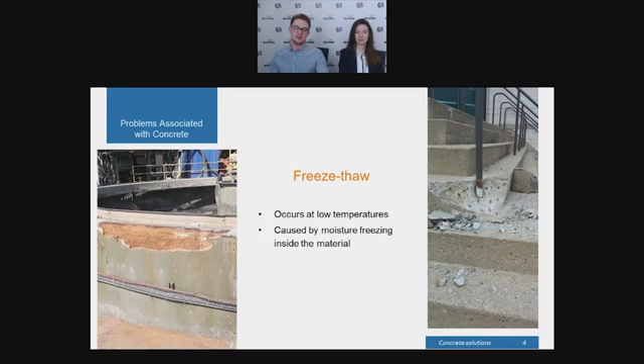Following on from the moisture theme, concrete requires moisture in order to attain a full cure. There are very set mixing ratios for concrete to get a good mix with good mechanical strength after it's cured. The strength of the concrete is entirely dependent on this moisture content.

If we have too much moisture, the concrete may stay wet for a considerably longer amount of time. Or if you have too little, it may evaporate too quickly for the concrete to attain its full mechanical properties. This is the point where you tend to get shrinkage in the concrete.

So you've got rapid evaporation, and the concrete tries to fill in those gaps, and as it does, it shrinks. As it shrinks, it pulls itself apart, much like in the freeze-thaw damage. You get internal stresses which crack the concrete and cause it to fall apart and break away. Because of this, you lose some of the mechanical strength of the concrete, meaning it can't withstand the sort of industrial environments it's normally placed into.

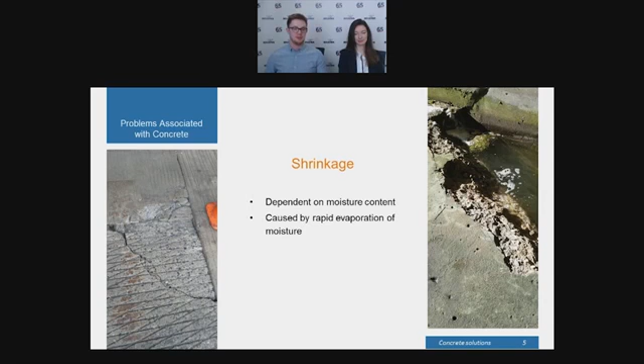Again sticking with the moisture theme, carbonation is a massive problem throughout industry. It affects pretty much all types of concrete regardless of where it is, but it's most damaging on reinforced concrete. What we mean by reinforced concrete is any concrete which has a structural rebar or steel going through the centre to give it that extra structural capability.

This is caused mainly by moisture and CO2 absorbing through the pores of the concrete and getting down to the rebar. Concrete is normally quite alkaline in nature, and the passivation layer that sits on top stops the corrosion from happening. If you lower this alkalinity and make it more acidic, lowering the pH level of the concrete, you tend to find that the passivation layer disappears.

Once this disappears, it's effectively like not having a coating anymore. The rebar starts to corrode, the rust expands inside the concrete, and exactly the same as the freeze-thaw damage and shrinkage damage, you get spalled concrete as a result. This then exposes the rebar further, causing it to rust more, and it's a vicious cycle at the end of the day.

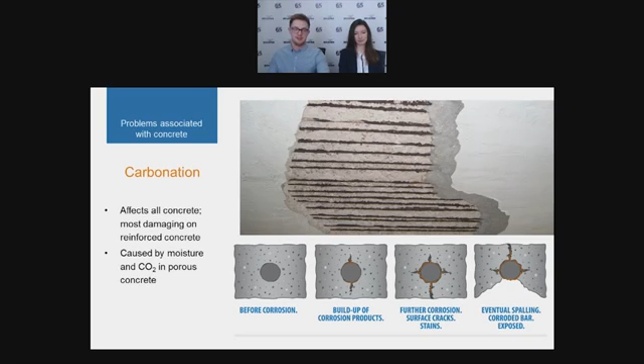More on the mechanical side of things, we have abrasion. This is a major issue in areas involving heavy machinery or types of transport. Heavy duty materials that are used, and repeated contact, cause this concrete layer to wear down over time.

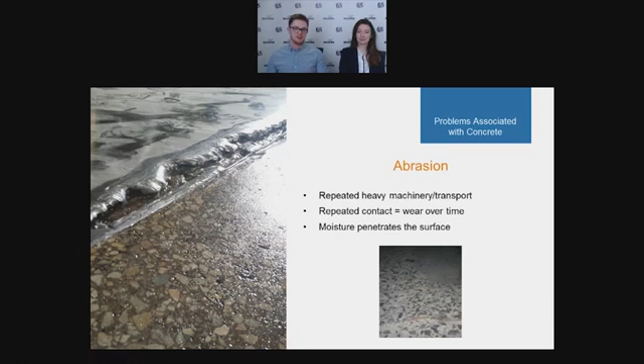But as said previously, this allows moisture to penetrate further into the concrete, and again it's another cycle. You remove that top layer, moisture gets in, that damages the concrete, the next layer gets removed, moisture gets in, and it's just a vicious cycle afterwards. So you get wear, repeated contact and wear over time.

As I've already stated, concrete is a very alkaline material, so if you change the pH it messes about with the binders inside the concrete itself. This can actually cause it to lose its mechanical properties purely from contact with a chemical of some description.

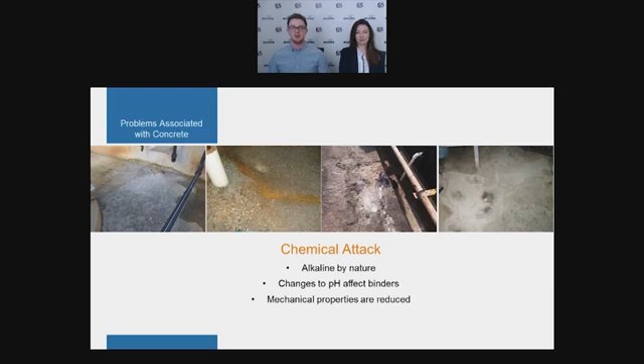So you change the pH level, you affect the binder of the concrete, and if you affect what holds the concrete together, then it's either going to dissolve into the chemical itself, or you're going to lose your mechanical properties. So if they're reduced, you'll find again that impact damage, abrasion, freeze-thaw damage, shrinkage all become a major issue and become much worse in the presence of certain types of chemicals.

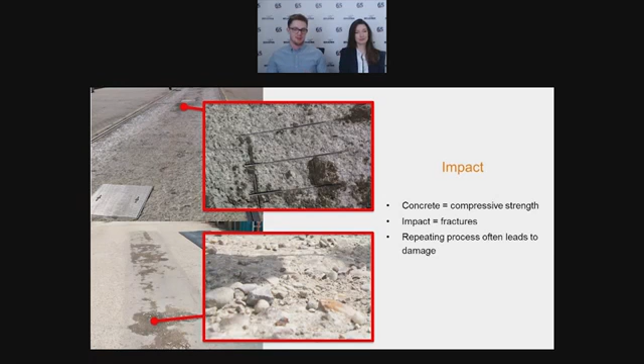So once the damage has taken place, as you can see in the pictures, it's going to be very easy for moisture to then get into the concrete, and again, it's starting that vicious cycle of damage and then moisture ingress, which causes carbonation, shrinkage, freeze-thaw, and all the damage mechanisms that we've just discussed.

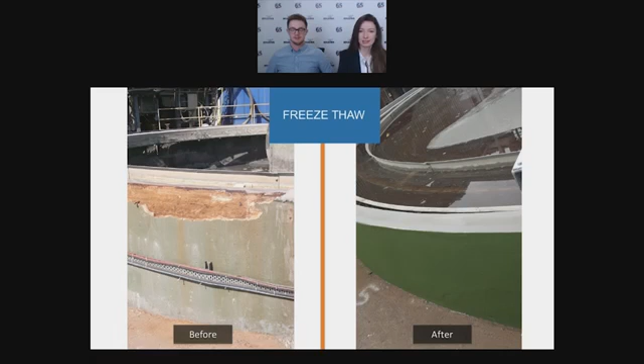Okay, so now we've explored some of the issues that concrete can experience, we want to look at the solutions, how to fix it. Like-for-like concrete repairs are often favoured, but these often struggle to adhere to the existing substrate. Besides, what's to stop the same damage from happening again?

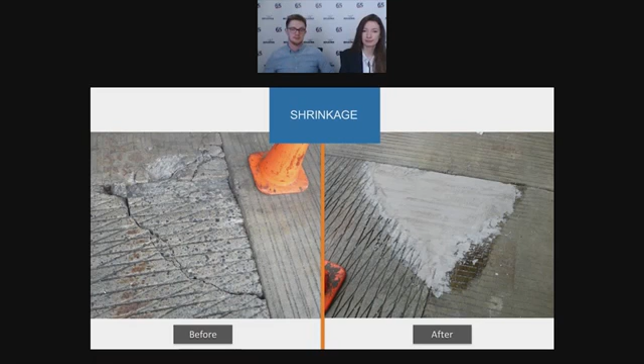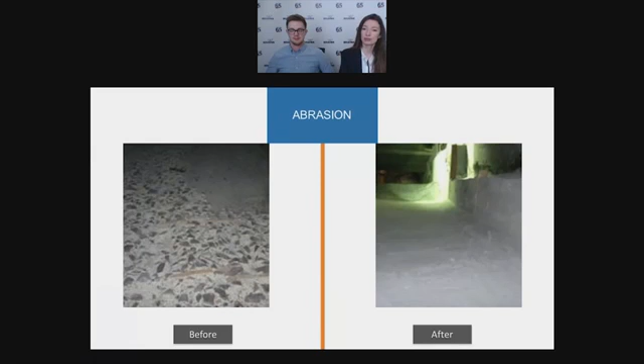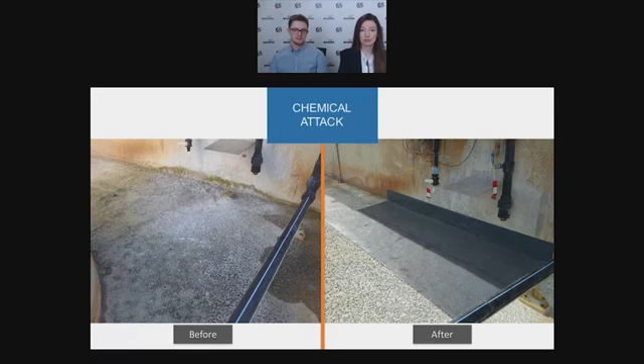Belzona has created a range of 100% solids epoxies for mortar repairs as an alternative to traditional rebuilding. These epoxies are designed to restore concrete structures, protecting them and prolonging their lifetimes. And rather than individually trying to solve every one of those issues Henry was just discussing, Belzona have created just a handful of versatile systems which can be used to treat an infinite amount of problems.

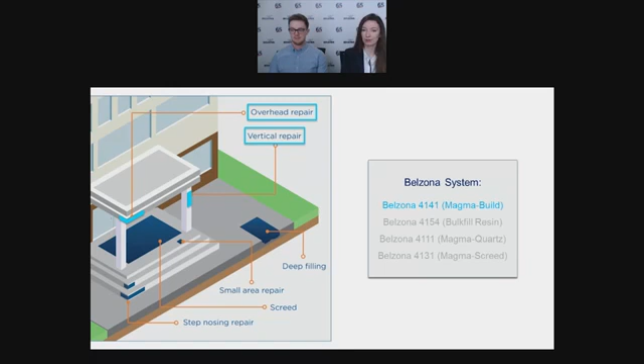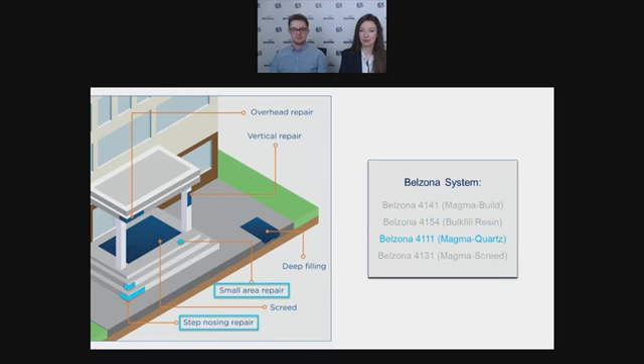So our solutions are designed by area to cater them for the necessary repair. For example, overhead and vertical damage can be repaired with our lightweight mortar, Belzona 4141. For large areas, we have Belzona 4154, a bulk fill material. Smaller repairs can use Belzona 4111, our classic nifty mortar repair composite. Or if you need to screed an area, Belzona 4131 was designed for that.

Our materials can also protect against chemical attack. Belzona 4181 is a chemical-resistant screed, or you can use the coating Belzona 4311 on top of another material.

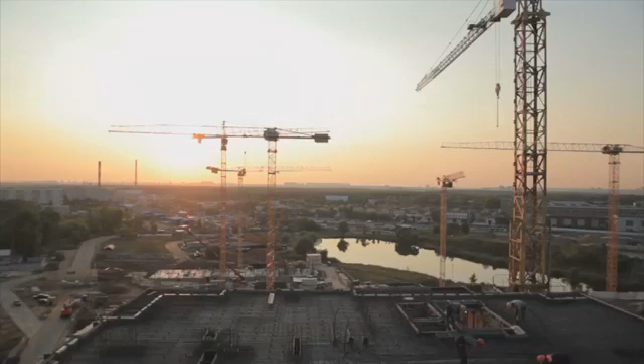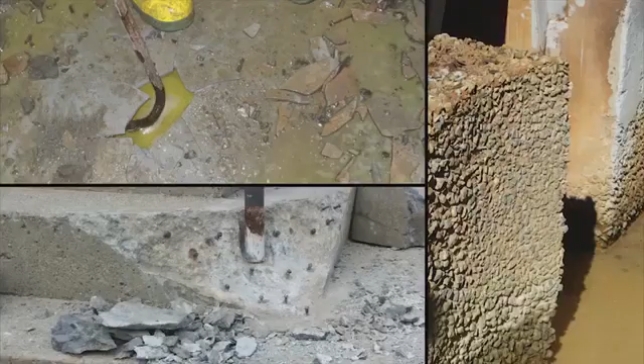Concrete is the most widely used construction material in the world. As a consequence, concrete damage and deterioration are perhaps the biggest problems encountered by buildings and structures. From floors and steps to walls and roofs, the effects of damage are clear to see across multiple areas. But is more concrete really the answer? As an alternative to like-for-like repairs, Belzona offers a variety of polymeric mortar repair and protection solutions.

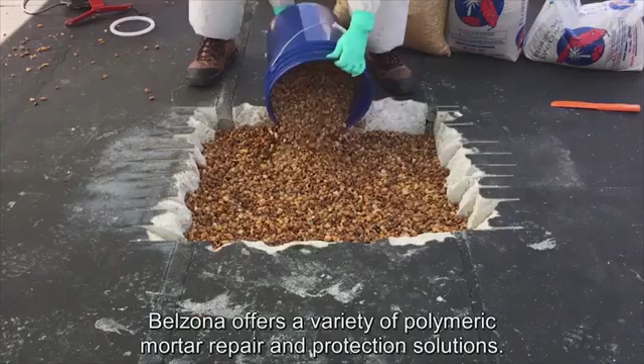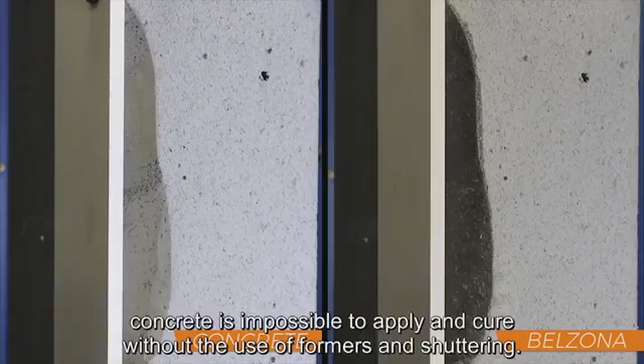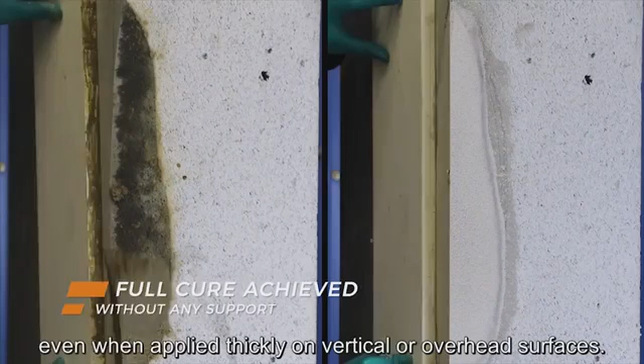These materials offer superior application and performance benefits. In this video, we put some of these to the test. For vertical or overhead applications, concrete is impossible to apply and cure without the use of formers and shuttering. Instead, Belzona's materials can repair the damaged area with minimal support and fully cure without any shuttering. For example, this high-build concrete repair material will not sag, even when applied thickly on vertical or overhead surfaces.

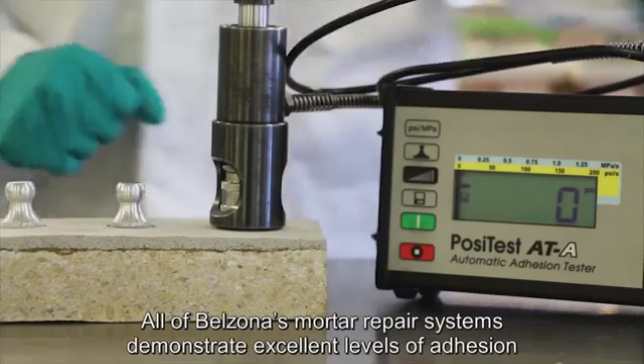The lasting quality of Belzona is better too. All of Belzona's mortar repair systems demonstrate excellent levels of adhesion, even on vertical and overhead surfaces. In fact, Belzona adheres so well that it's stronger than the cohesive strength of concrete.

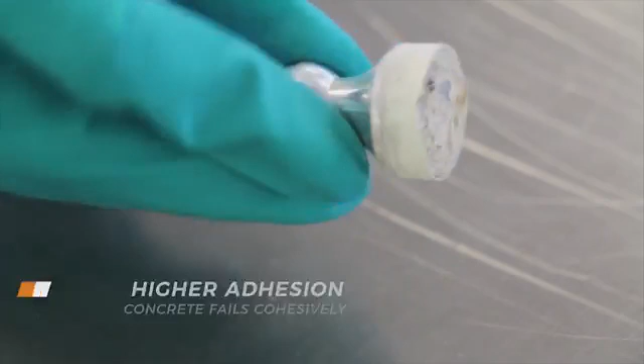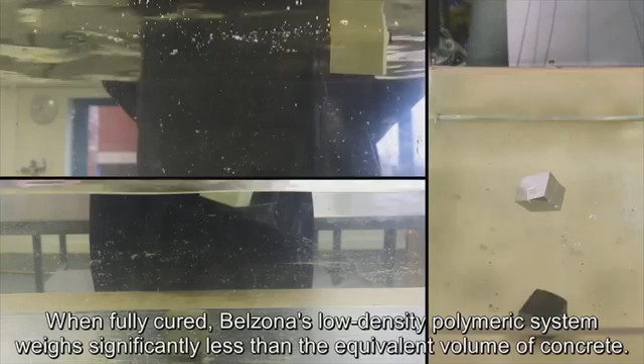Lightweight properties also make Belzona superior to like-for-like concrete repairs. When fully cured, Belzona's low-density polymeric system weighs significantly less than the equivalent volume of concrete. Lighter materials make applications easier and quicker.

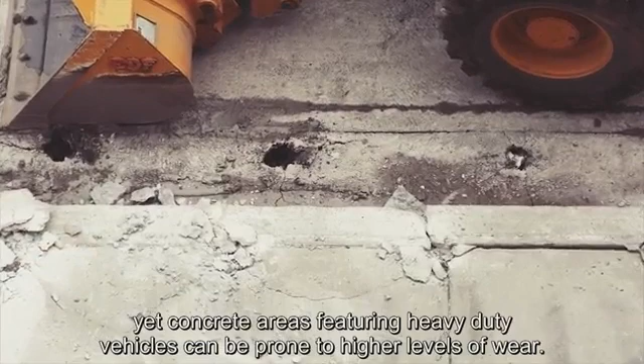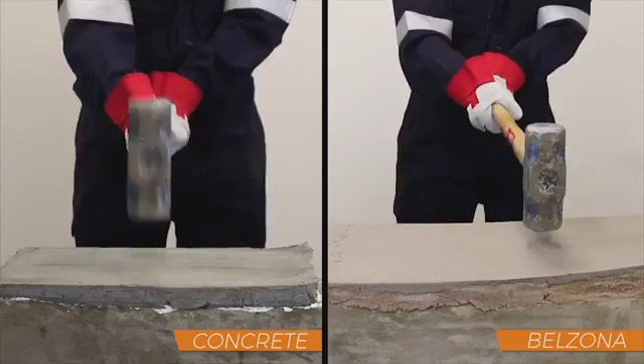Even light pedestrian traffic can result in deterioration over time, yet concrete areas featuring heavy-duty vehicles can be prone to higher levels of wear. Belzona can prevent this problem from reoccurring with rebuild materials that provide long-term resistance to both abrasion and impact. Loading bays and storage areas make excellent examples where these solutions have proved beneficial.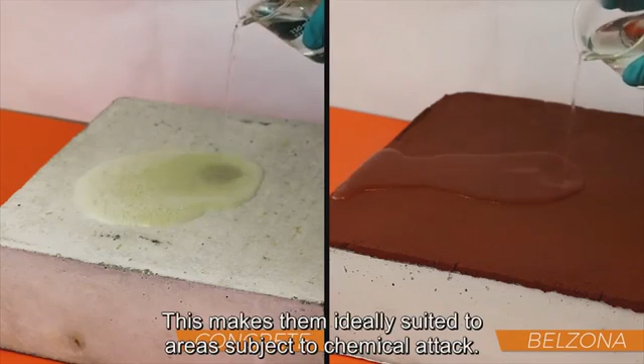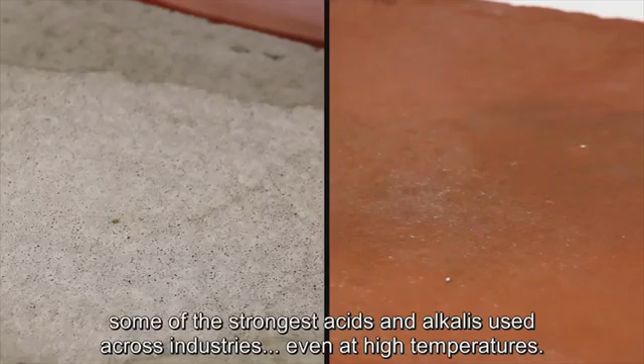Whether exposed to the environment or aggressive chemical contact, Belzona's concrete repair composites are non-porous and do not absorb water or chemicals. This makes them ideally suited to areas subject to chemical attack. In fact, Belzona's range of mortar repair materials and coatings are capable of resisting some of the strongest acids and alkalis used across industries, even at high temperatures.

For each application area and service environment, Belzona offers a superior solution to repairing and protecting damaged concrete. And as demonstrated, you can be guaranteed that these benefits will come as standard.

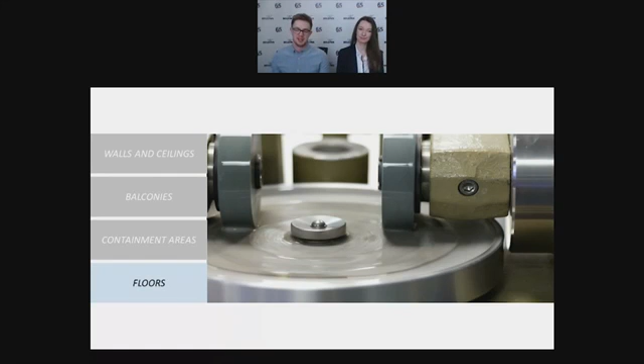Okay, so the first case study we're going to go through is to do with floor areas. The one thing we're looking for from a product to repair a floor area is mainly long-term durability. You want to be able to apply the product onto the floor and leave it to do its job for a considerable amount of time after the application.

So the first one we're looking at is inside the freezer of a meat factory. This is a good example of the type of damage you find literally all over the world in large industrial areas which are built primarily out of concrete. The concrete we're looking at inside the freezer is about 40 years old, so considering the service time it's been in for, it hasn't actually done that badly. However, if the customer left this completely untreated, it's going to cause some significant problems in the future.

When we faced the customer and said, how are we going to go about doing this? They said we've got 3 issues we need to overcome first. The first one was they needed 24/7 forklift access to the area. Second problem was that there were multiple areas, not just the one. And they also only had 3 days to complete the application.

Obviously, using concrete to fix this, you'd have to have that minimum 28-day cure time before you get your mechanical strength to allow this to go back into service. That's unacceptable throughout the 3-day window.

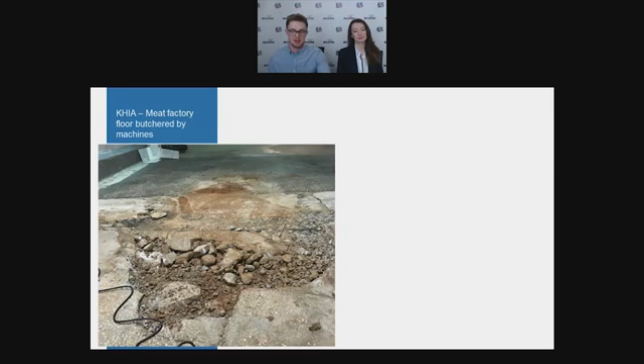So Belzona was chosen, and the first stage of any application is normally surface prep. We're looking for a surface which is clean, dry, and firm. In this case, roughness is not required because the surface was rough enough already, so you avoid the need to use machines which may incorporate difficulties in terms of hand-arm vibration values, or HAV values. So that was avoided completely.

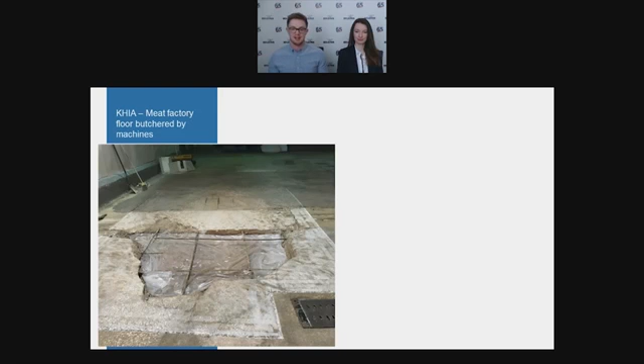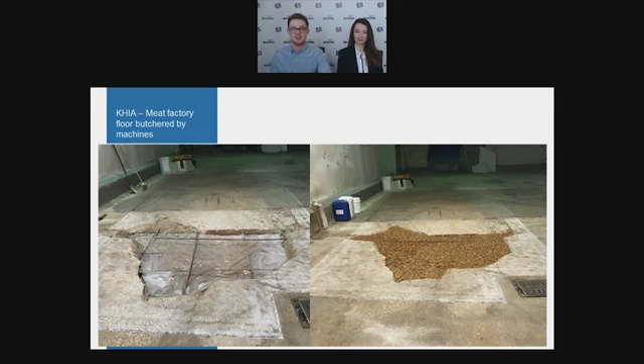The product itself we used was Belzona 4154, bulk fill resins and an aggregate to pack out the main section of the repair itself. And then Belzona 4111 was applied on top of that surface to give you your mechanical properties, compressive strength, tensile strength, impact resistance, and general dilute chemical resistance as well.

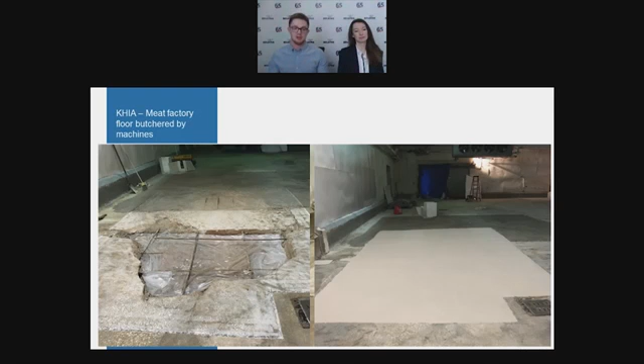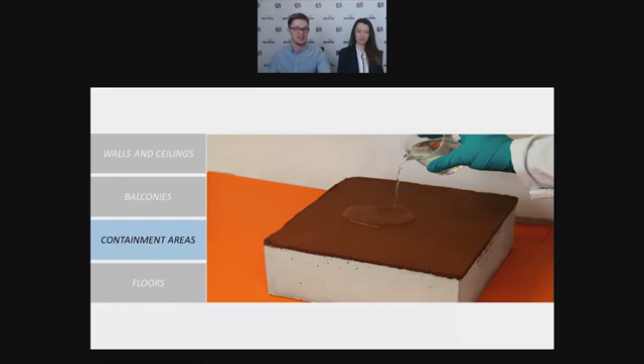Now we'll move away from the floor areas to secondary containment. This could be a bund or secondary storage where if something leaks out of a primary storage tank, it goes into this area. The one thing we're looking for mainly is excellent chemical resistance from our products.

The application we're going to look at is a solvent extraction plant in a mining facility. What they had was they removed the copper ore out in the mine, and you find that you've got the copper in with lots of different impurities. In order to extract this copper, they dilute and dissolve it into sulfuric acid.

Obviously, introducing sulfuric acid into concrete is never a fantastic idea. Over time, it will break down and wear away. So the 2 problems they faced with this: one was the sulfuric acid, and the second was that they had this sulfuric acid mix at 50 degrees centigrade, so it's not a cold mixture either. And as we know, the hotter the chemical gets, generally the more reactive it tends to get.

So the concrete was beginning to break down over time, and once it broke down enough, eventually that sulfuric acid could find its way deeper and deeper into the concrete and cause more severe damage to it. So it seems like quite a complicated issue.

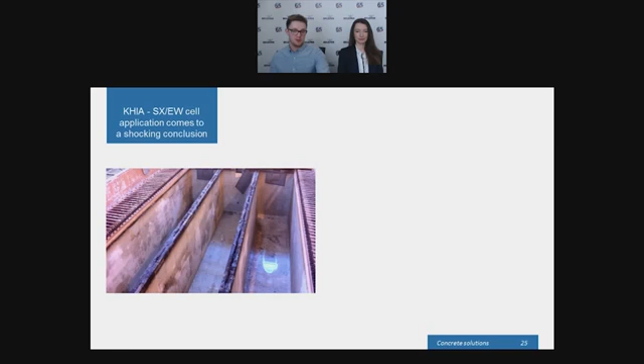But fortunately, the repair was relatively straightforward. Again, after surface preparation, clean, dry and firm, Belzona 4111 was used to restructure the concrete. Anything that was damaged or needed rebuilding back to its original profile was rebuilt using 4111.

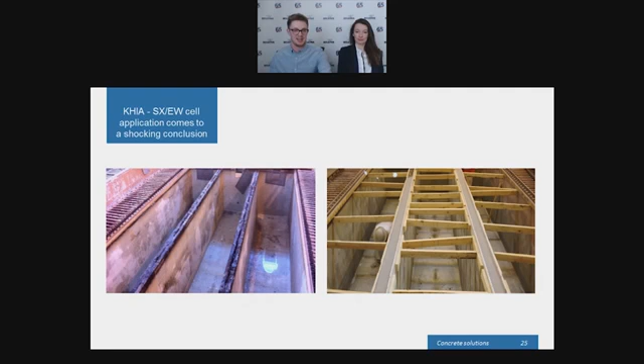Then Belzona 4341 was used, which is designed for hot inorganic acids, to protect the surface from further damage. This prevented the sulfuric acid from even getting to the concrete or to the Belzona underneath in the first place. And if you can prevent it from getting there in the first place, you prevent the damage from happening.

The customer was so happy at the end, after the coating job was finished, that they actually supplied and applied this onto 100 other containment cells as well, just proving that the solution was one which they were very much looking to invest in because it was a workable solution.

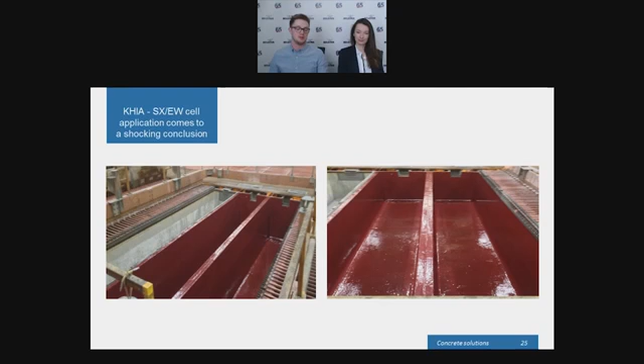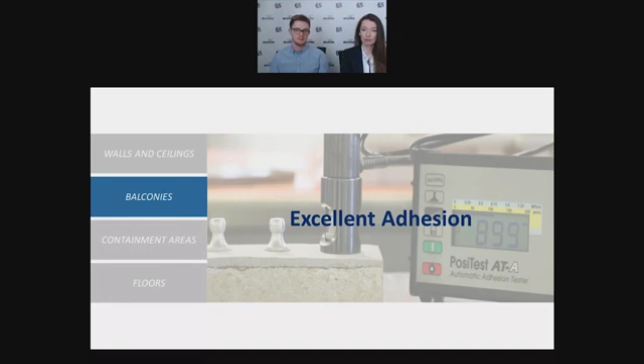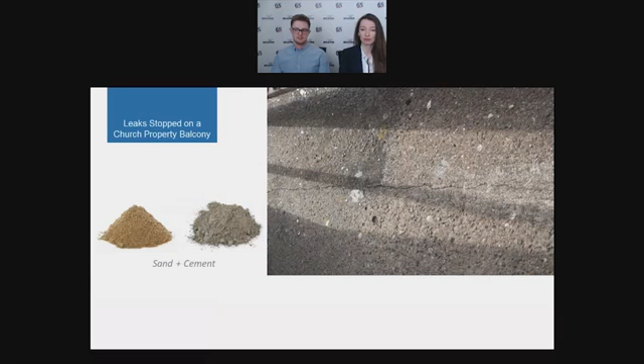Next we're going to look at a case study where a solution was needed which would be able to bond to cracked concrete, as previous traditional repair attempts had failed due to poor adhesion. This was at a church property where a balcony was seeing cracks due to its natural movement over time, and these cracks were allowing water to seep into the substrate.

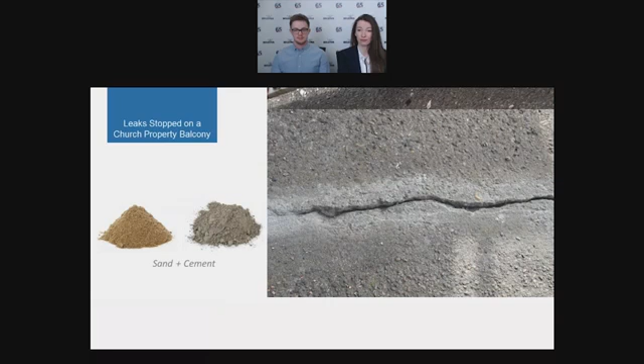Originally, the client tried to repair the balconies with a sand and cement mixture. However, the adhesion of these materials simply was not good enough and they failed. The client wanted a solution which would be long-term and cost-effective, so turned to Belzona.

For this application, the screed solution was specified, Belzona 4131. This was because of its outstanding adhesion and ability to feather edge, so this was used to repair the cracks. Then to fully waterproof the balcony, Belzona 5811 was coated on top. This also left an aesthetically pleasing finish on the balcony.

Finally, we've reached the top of the building, ceilings and vertical walls. We're going to be looking at our material, Belzona 4141, which has excellent lightweight properties. As you heard in the video, Belzona can repair vertical damage of up to 127 millimeters and overhead damage up to 76 millimeters, and this is with minimal or no formwork usage.

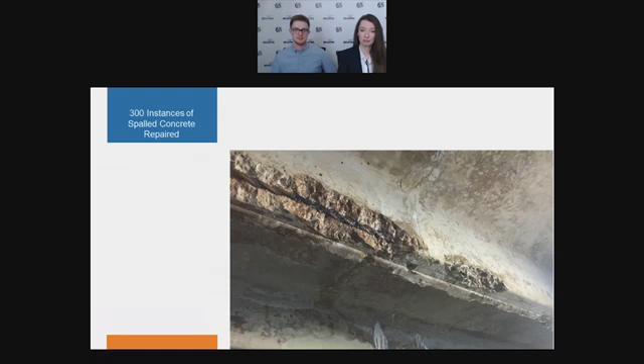These properties made Belzona 4141 an ideal solution for this case study at a severely damaged office building where hundreds of repairs were needed. At this office, literal chunks of concrete were falling down from the facade, which is obviously a massive health and safety risk. A full repair was necessary, which Belzona was able to provide with just the one product, Belzona 4141.

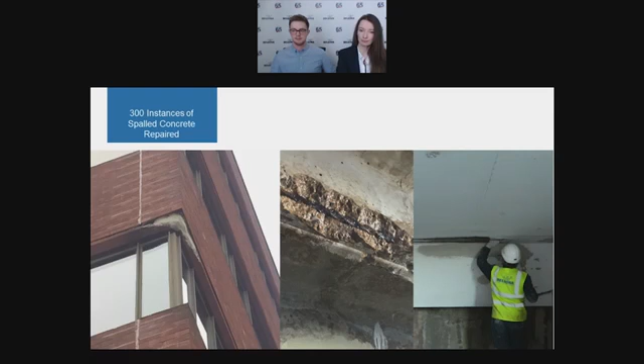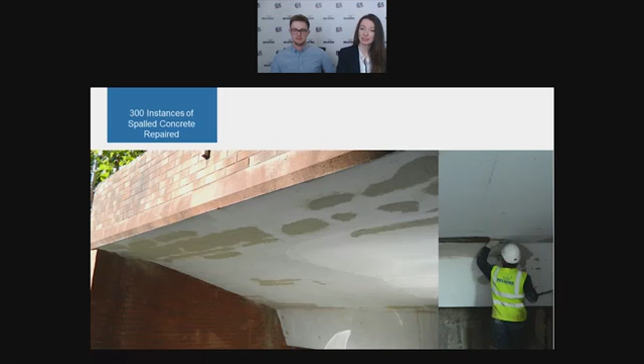In total, over 300 vertical and overhead repairs took place around the building over about 3 months of working weekends only, which is quite fast considering. The office was completely restored, with minimal disruption to its everyday operation.

A final reason Belzona 4141 was chosen was because it can be tinted. In this instance, the red tint ensured the system blended into the office's facade, and these repairs were barely even visible.

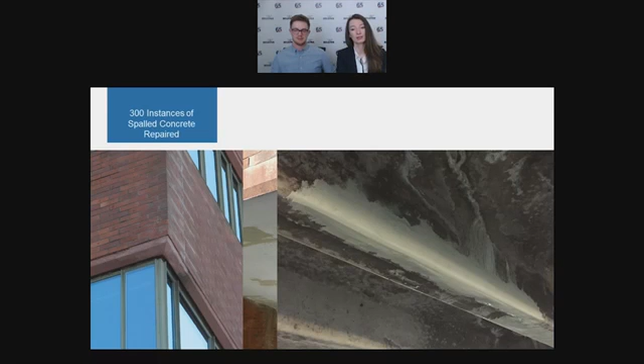All of these case studies, all of these products that we've suggested already, they all have their own individual merits. So 4141 is lightweight, 4341 is chemically resistant, 4131 is abrasion resistant, impact resistant, that sort of thing.

But a lot of these products also share common features throughout as well. Most of the products are two-part materials with relatively easy to follow mixing ratios. There's no volatile components inside the products. They all exhibit good mechanical strength. The magma polymer screeds can be feather edged. So it's not a case of every single product having a very specific use. They are good generally across the board, but also have specific areas, like the 4141 lightweight, where they can be used for very, very specific problems.